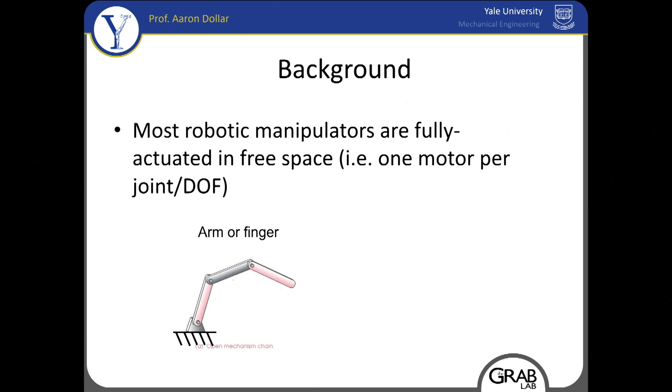If you think about most of our robotic systems, we put an actuator on every joint, and we can move them around in free space with no issue. If you imagine this three-link serial chain as a finger or an arm moving around, imagine there's a joint at all of the three links, no problem. The challenge really begins when you make contact, and the contact adds constraints. And I like this example because it should kind of hammer home a little bit the situation.

It's exaggerated to an extent, but when you make contact with that fingertip, that contact is going to impart some kinds of constraints to the system.

It won't be a complete joint like that, but it might functionally be a complete joint. The real issue here is that in free space, that 3-link manipulator has 3 degrees of freedom. But as soon as you make contact and establish that other joint or constraint, it goes to a 4-bar linkage, which has 1 degree of freedom.

So all of a sudden you had 3 actuators acting happily in free space, and now you have 3 actuators trying to control a 1 degree of freedom kinematic system. You're inherently over-constrained, redundant. It's a challenge, especially because most of our actuators, to be practical, have to be highly geared, and that makes them mostly position sources, which are especially sensitive to this kind of over-constraint.

So what can you do about it? Well, there's a lot of challenges I mentioned. Impedance and torque control is really the typical way you'd want to deal with this. It requires some way to sense forces or torques, and then deal with it. There's all kinds of challenges dealing with backlash and other things as well. But it definitely helps.

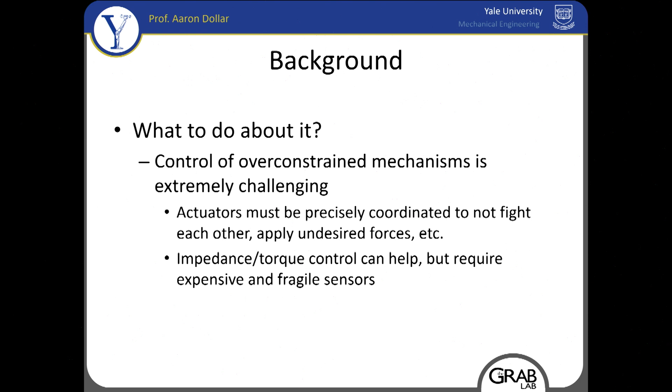In highly controlled environments, this is not as big of an issue, but in unstructured environments with a lot of uncertainty, it becomes especially challenging. There might be a solution to deal with this. There is a solution in that case, but you might not know what that solution is in order to make it actually work.

So essentially, where I come at this from is, instead of thinking about this in a control sense or other kind of sense, can you just deal with this from the bottom up, from a design approach? You probably know that compliance can help, and we already talked about how impedance control can help. It basically adds some springiness to the system, and that springiness allows some amount of passive reconfiguration.

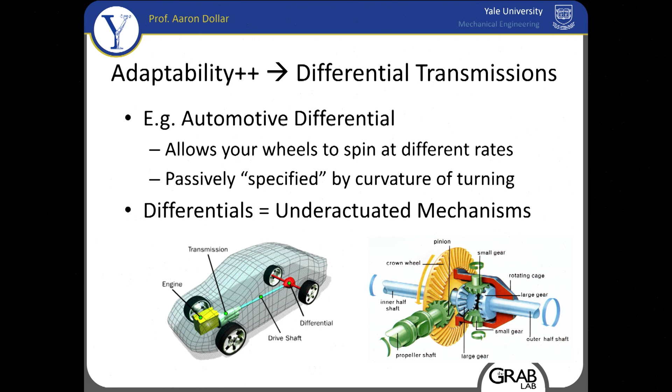So this is really a brilliant design. It's been the standard for 100 years now, essentially, in cars. And these differentials are what we call underactuated mechanisms. Underactuated comes from the sense that you have fewer actuators than degrees of freedom of the mechanism. The term underactuated is used in a lot of other senses as well, like in a control sense, but for us, we're talking about it from a mechanism standpoint, which you can think of as differentials.

Both compliance—mechanical compliance, which is springs—and differentials add degrees of freedom to the system to help deal with this overconstraint. So you're really not dealing with the overconstraint directly. You're basically adding more degrees of freedom so you're not overconstrained.

When you're talking about springiness, whether it's impedance control or mechanical springs, you have this constraint of F equals Kx, or however you want to think about it. That can be fine in certain situations, but in others it can be problematic. Either way, it's some kind of additional constraint. With differentials, they can essentially be completely unconstrained. There's friction in the mechanism, which adds some constraints, but you can get adaptability without that F equals Kx relationship, and also get a lot bigger ranges of motion.

Your car differential essentially has an infinite amount of range of motion that it can handle.

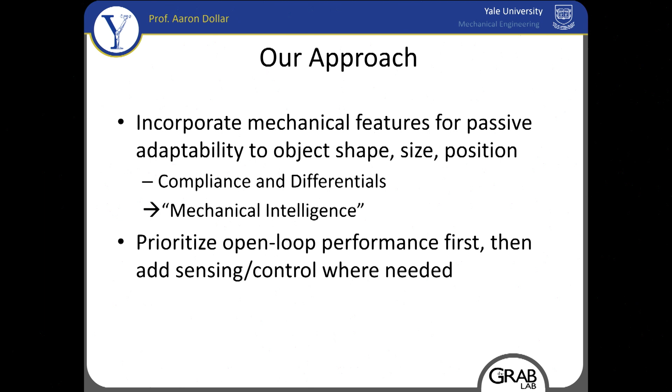So the approach I've been taking is to incorporate these kinds of mechanical features in order to deal with real-world contact issues that are highly problematic, especially in robot manipulation, and do it in a way that's purely passive. I started using the term mechanical intelligence—other people use similar terms now. Basically, this is trying to get computer scientists to appreciate the value of mechanical design, but it's basically just good mechanical design.

The idea is essentially to prioritize open loop performance first and incorporate some of these nifty mechanisms, and do it from a bottom up approach. Only really go to the point where you need additional sensing and control if it's absolutely necessary. We always need high level perception, but it's mechanism first, essentially.

One of the issues with underactuated mechanisms is, if you go back to that example of the finger moving in free space, to make it so it's not over-constrained at contact, you have to have it be under-constrained before contact. That's where the real challenge lies in designing these things—you can always add purely passive joints, but as soon as that constraint is removed, they're just going to flop over and not be able to support even their own weight. So you need to be able to apply torques to all of those degrees of freedom, and that's really where the challenge lies in actuating these things and coming up with mechanical solutions.

So you have to start off being under-constrained before contact, and we do use a lot of springs in order to have the robot keep its shape before contact. You try to keep them as soft as possible, but you have to deal with gravity and so forth. You basically want to loosely couple those degrees of freedom when you're moving in free space, so that when you do make contact, it's fully constrained.

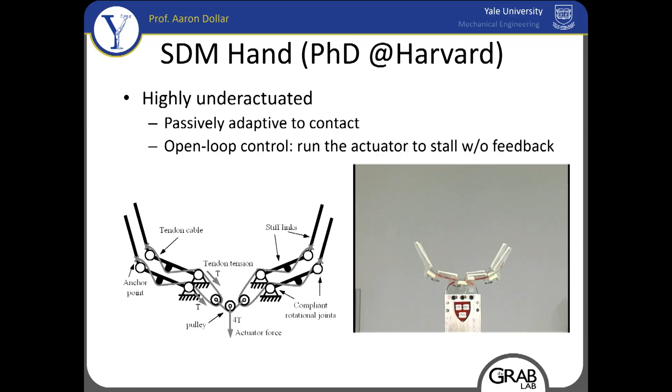Just to put this in a more concrete example, this is the hand that was the product of my PhD work. I did my PhD at Harvard with Rob Howe. Just to break it down, focus on one finger here for a second—there's a single tendon anchored on the distal link that runs over some pulleys to the base. Those pulleys are designed so that you apply torque to both joints of the finger, okay? And it moves freely over here, so this is sort of like a free spinning pulley.

And essentially when I pull this tendon, both joints move. There's some springs there that keep it in its default configuration. But I pull on this tendon and both move.

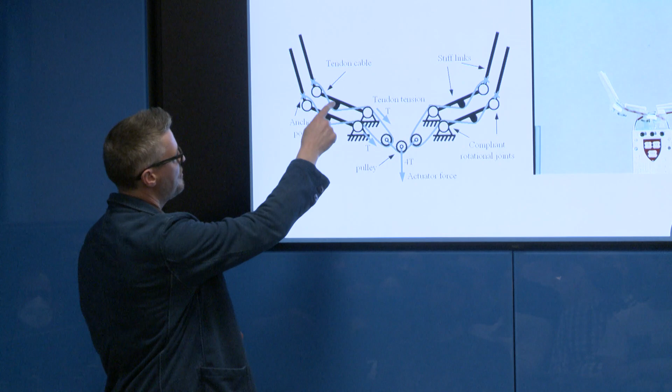Now, where this finger is underactuated is if I make contact on this proximal link, I can keep pulling that tendon, and this distal link is going to keep closing until it makes contact. So I can just blindly pull this tendon until it stops moving, and in an ideal world, which is what we try to design for, you're going to make contact on both links. Just pull it till it stops moving, and you make contact.

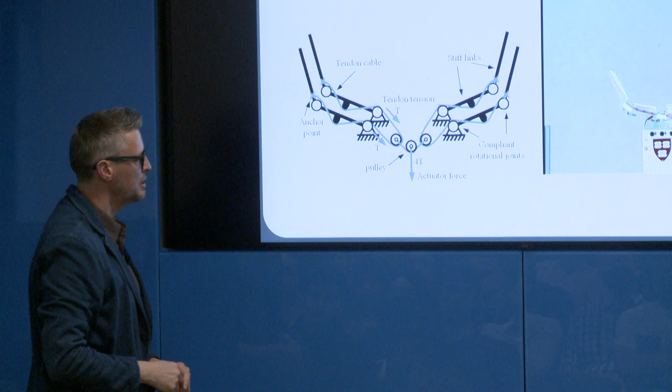Now, if you build up this pulley differential in this kind of stacked fashion, it allows all the fingers to kind of give or take tendon as needed, right? And you just take this single tendon at the base, and all 8 joints of this hand will continue to close until they make contact and are immobilized. So essentially, it's under constrained, and you just keep pulling this tendon until it becomes fully constrained, and that is when you have sort of a stable grasp.

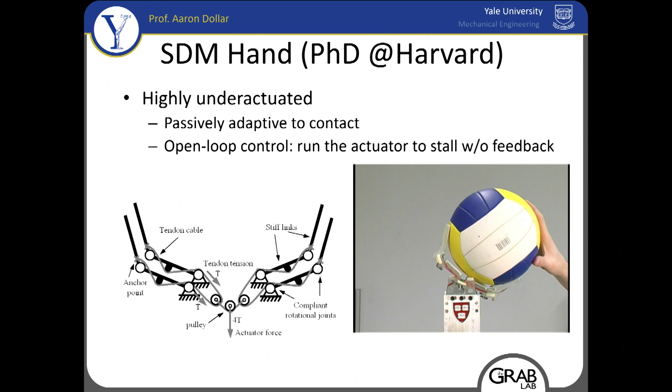So just to kind of show that here, this is all open loop. We're just running the single actuator to stall, and I'm just putting things in the hand, mostly just to show how it passively adapts to the different shapes of object, different positions of those objects, with the idea that we wanted to optimize not just the range of objects, but also the amount of uncertainty, right? So if you're offset from the center of the object and so forth, it still works.

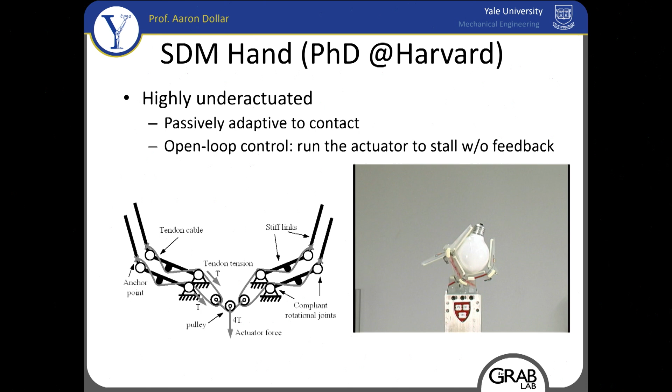Again, no sensing here whatsoever. We're just running that single actuator to stall. I spent a lot of time designing it, but it just sort of works passively because of this concept.

And then here's using it in a little bit more of an interesting setting. I'm teleoperating this. The robot there is set up in just the 3 degree of freedom configuration. So we just have essentially XYZ control of this, and I'm looking at it from the side, and I'm just hitting a button to close the hand whenever I want to.

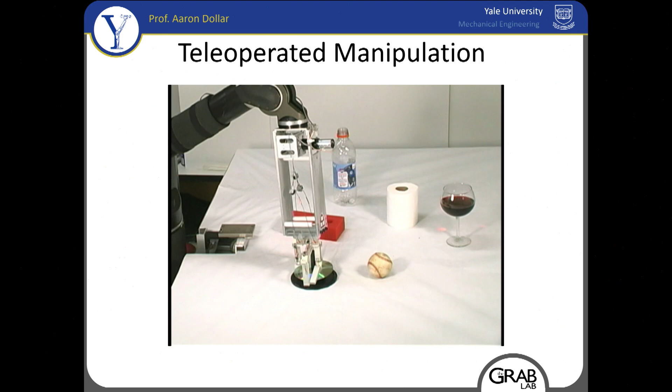You're seeing benefits not just of the under actuation, but also the mechanical compliance, which is off axis, right? I showed you that planar diagram in the last image. There's a lot of sort of softness off axis here as well, as you can see.

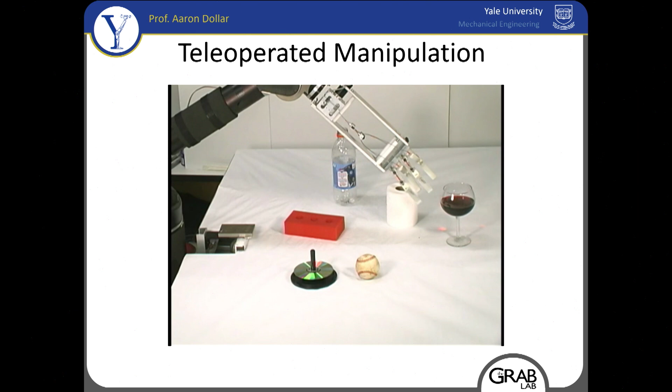So my typical joke here that I would tell, which maybe some of you have heard before, is I would do this activity and it worked great, very robust, reliable. There was a program manager coming through the lab, and my advisor said, 'Aaron, show him the demo, right?' And so, busy guy, I'm trying to do it fast and impress him and everything. And the first time I spilled the wine was in front of this guy, and we didn't get the funding, but. Anyways, it works really well.

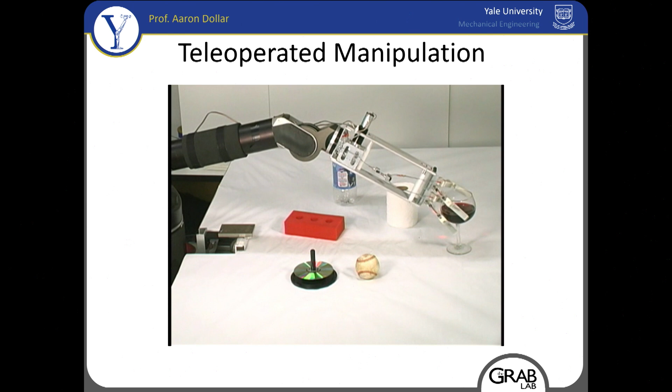You see that very natural, very compliant interaction. Certainly I'm benefiting from my own perception here, but if you really just focus in on the hand itself, right, it's all essentially open loop.

All right, so kind of just to summarize why it works, any of those contacts are going to add constraints. And in a typical robot system that is fully constrained to begin with, you're going to end up being highly over-constrained. And that's essentially because you're going from an open kinematic chain to a closed kinematic chain. And that's just physics. You can't get away from that. It's always going to be the case. And so any of your actuated degrees of freedom, especially because your actuators aren't ideal, they become redundant and you have to sort of precisely co-activate these things.

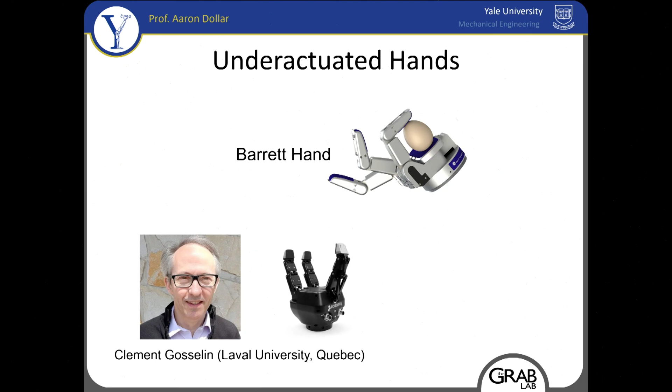Also, just to give credit where credit's due, if I can get back. So I kind of discovered this under actuation myself just by playing around with things, only to figure out that other smart people have figured this out too. The Barrett hand, which you could even buy when I did my PhD, has an under actuated mechanism in it. It's sort of a clutch type mechanism that decouples degrees of freedom from one another. And then Clement Gosselin at Laval University has really been doing amazing stuff in this area for quite a while. And he's often one step ahead of me. My nemesis now, he's great.

So this is actually work that Lyle Odhner did, who's here in the audience.

Just to show you how this can be applied to a bit more different types of situations. Here we designed the fingers and fingertips to be able to grasp small objects off the table. But you see there's lots of contact with the table here. Let me just replay these things.

So you're dealing with the constraint due to the contact with the table, as well as the constraints due to the contact with the key, and then also the closed loop constraints between the fingers once you make those kinds of contact. We're benefiting here from both the mechanical compliance, the springs in the joints, as well as the under-actuated closed loop chain.

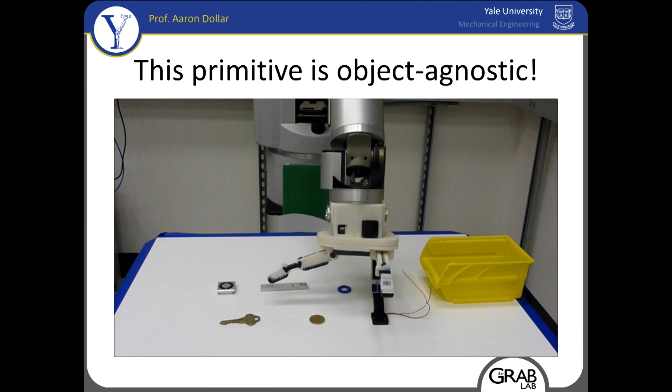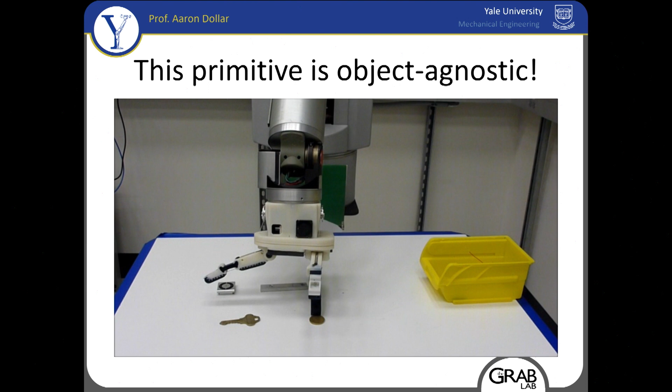Just to show you this, most robot videos you see the one good take, and you never know how many hundreds it took to get that one good take. So this is doing a whole bunch of these things one after another. All we're doing here is sensing the center of those objects and servoing the robot to that position, then doing an open loop, or feed forward, closing of those fingertips. You can see how robust it is.

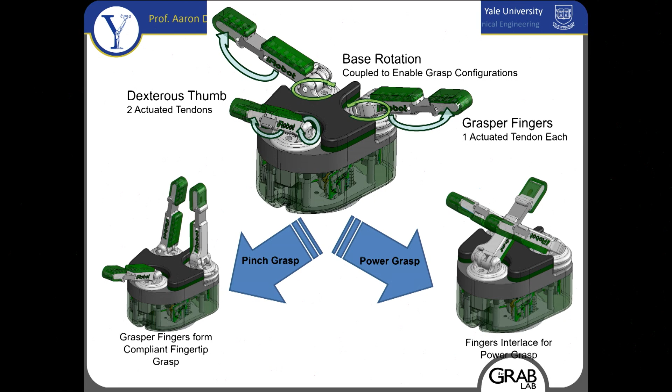This was the hand. It's three fingers, five actuators. We designed it so you could do both a pinch grasp for those small objects we looked at before, as well as a power grasp, like the first hand I showed you. And now we have a version of this available open source with four actuators that's otherwise similar, dubbed the Model O after Odhner, who named it after himself.

No, just kidding. But we had the original hand we called the Model T, and then we had to find other letters, so now we have a tradition of naming our hands usually after the person who made them.

So, all right, and they started a company. Lyle and two students from Harvard founded Right Hand Robotics, and they were selling the Reflex hand, as they called it for a while.

All right, so what I've shown you there is all grasping. Most of what I've been doing since then has been what you might consider dexterous manipulation, and maybe you'd also consider the pinching of small objects within-hand manipulation. But this is a much more difficult challenge.

But similar kinds of issues, right? You still have these closed-loop kinematic chains that you can't possibly get away from, so you have to design these systems to be highly under-actuated before grasp, before the object acquisition, in order to make it work properly.

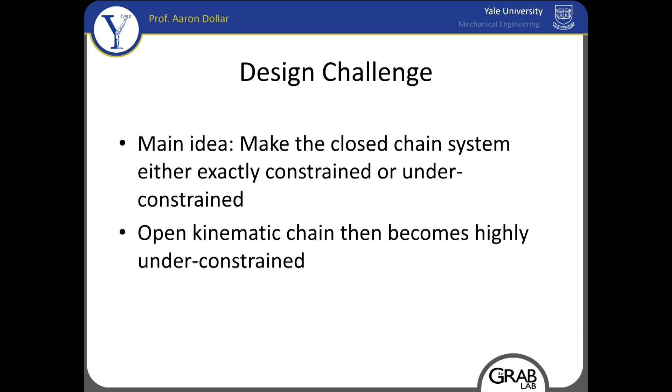At some point I realized there was a great analogy out there in terms of parallel mechanisms. If you think about grabbing an object with your fingertips, which is a lot of where your dexterity comes from, this is five parallel fingers or legs, however you want to think about it, all in contact with this object. People in the parallel mechanisms community have long wrestled with how to develop effective kinematic architectures that deal with having this highly parallel kinematic chain, without the actuators fighting each other.

And so essentially all practical parallel mechanisms out there are exactly constrained. What that means is, if you think about this Stewart platform - by the way, it's often used for flight simulators, with a cockpit and hydraulic actuators that move it around - it's 6 degrees of freedom.

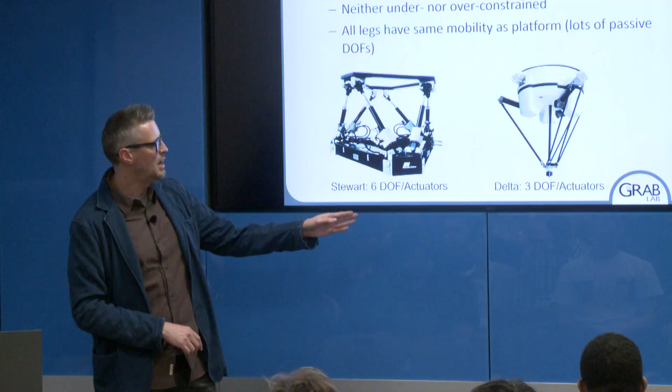Then there's the Delta platform, which you may have seen as a popular pick-and-place robot. It's got 3 actuators and moves in a strictly XYZ configuration. For all of these, the platform or output has exactly as many degrees of freedom as there are actuators. So for a 6 degree of freedom parallel platform, there are only 6 actuators, and any more would be redundant - they have to have some sort of orthogonality to them.

So what happens is, if you think about these connections, if this platform moves in 6 degrees of freedom, that means these legs also have to move in 6 degrees of freedom, right?

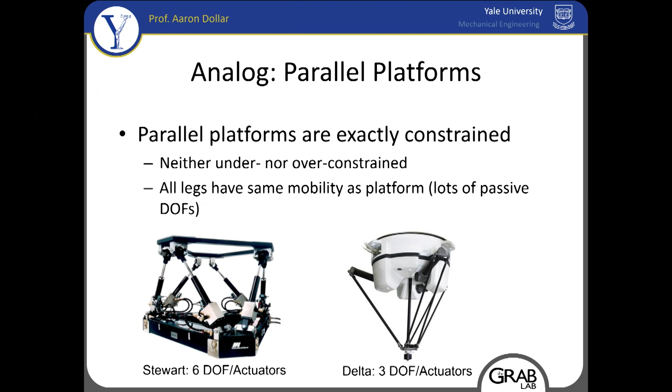Because they have to track it, each of these legs or arms, however you want to think about it, have to have 6 degrees of freedom. And if you need 6 total actuators, that means each on average needs 1 actuator and 5 passive degrees of freedom. So that's the case with these. There's usually a spherical joint on one end and a universal joint on the other, to add the other 5 degrees of freedom, because they all have to move with the platform. Same with the Delta platform.

So I started to hire some postdocs from the parallel mechanisms community to think about this, and we started doing a little bit of modeling and so forth to actually develop some hands from this. Sorry, I'm going to go quickly because that was written out versions of all the stuff I just said verbally.

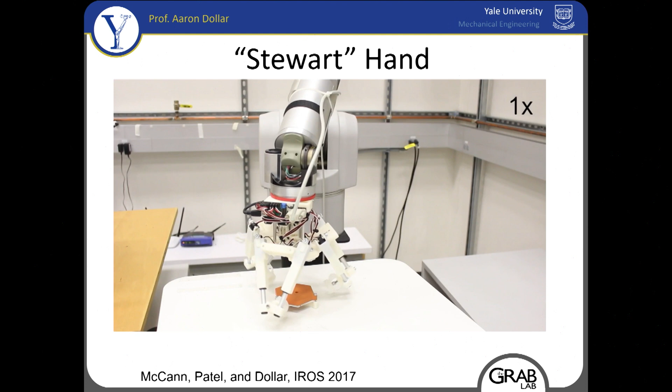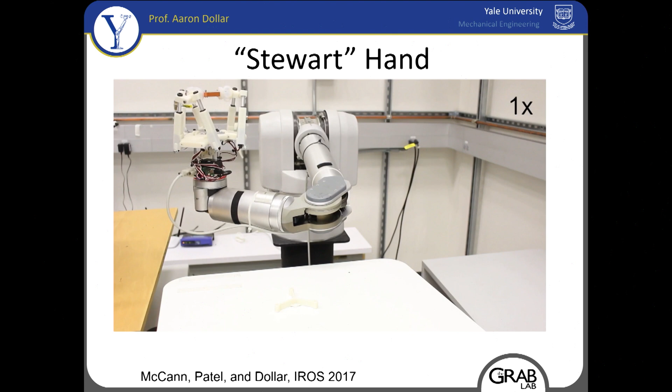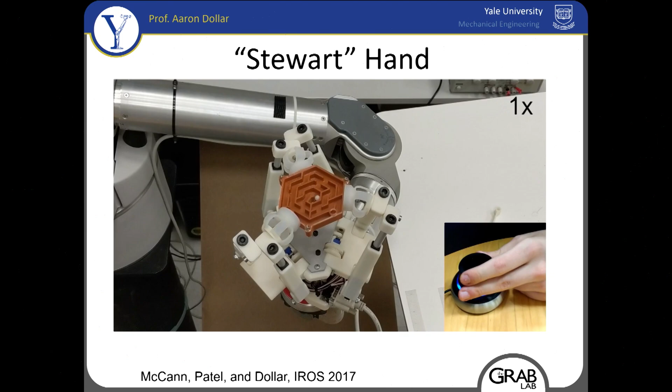This is what we call the Stewart hand. We essentially use the kinematics of the Stewart platform. It looks like 3 fingers here, but we coupled 2 of these actuators each to have sort of 3 fingers. We basically built a highly dexterous 6-degree of freedom hand that is exactly constrained—well, not exactly, there is one additional actuator that opens and closes the fingers, but after contact is made, that actuator is sort of out of the loop. So we can grasp objects and manipulate them in 6 degrees of freedom. It's teleoperated here, but you can see the dexterity, and we have similar ranges of motion as the Stewart platform, so it's a pretty effective mechanism.

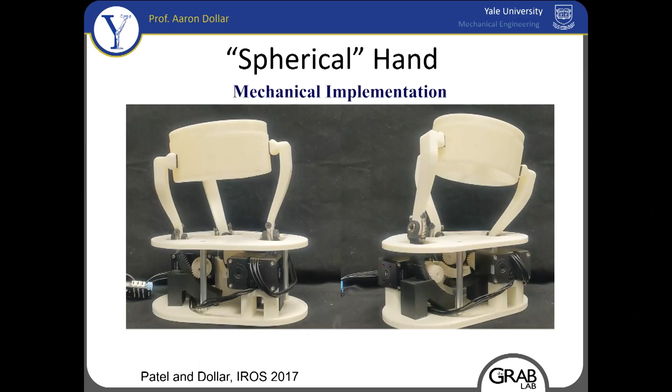Another cool design—we actually have a new version that's even better. This hand we call a spherical hand because there are 3 axes that all intersect the same point in space, making it a purely rotational mechanism. That point is fixed essentially, so it doesn't matter what you're grasping or where the object is contacted with respect to the hand—you're always rotating the object about that known fixed point in space.

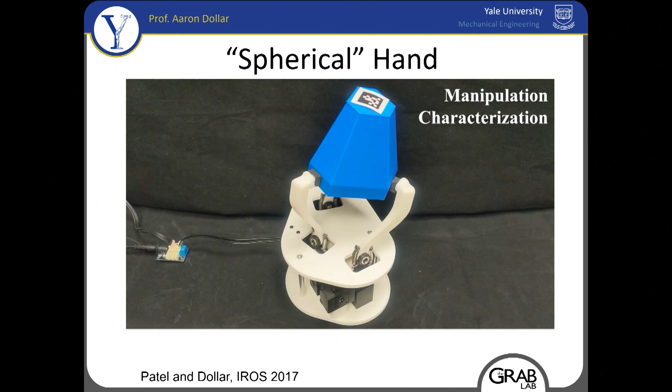At first we thought of this as just an interesting rotational mechanism, but now we think of it almost like a proxy or alternative configuration to a wrist, because that's essentially what your wrist does. Wrists are really hard kinematically, so the idea of unifying a hand and wrist together in a single mechanism is promising. This video uses the old configuration, which doesn't have nearly as much range of motion as the new one we're about to publish soon.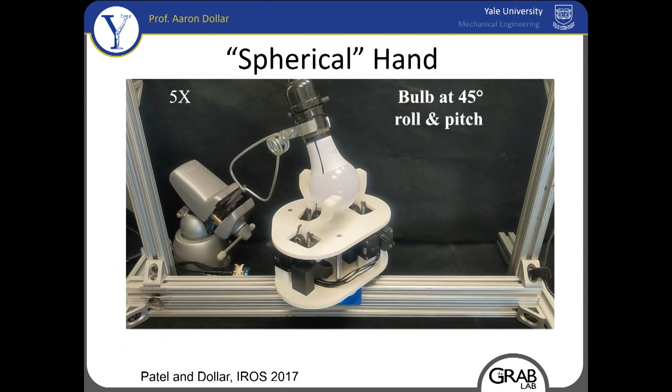This might be slightly out of order, but I started thinking about another way of viewing these constraints and the whole problem in general. From a control standpoint, you have all these axes—a hyperspace of control variables available to you. If you command your robot to do something, in these highly actuated situations you're going to have a single point in space that's a valid solution. With uncertainty in the system, you might think this point over here is the target you're reaching for when it's actually in the middle. This shows the difference with a traditional, fully actuated, rigid approach—you're always going to be off, and it's always going to break basically.

If you add passive springs or impedance control, you might dilate the volume you can be in and still have a successful solution to some amount. So as long as you're in that volume, if your uncertainty is limited, you still might be okay. Essentially, underactuated hardware allows a much bigger range of successful configurations, where as long as you're inside that volume, it's not going to break—it'll keep hold of the object and so forth. That's good not just for maximizing the allowable uncertainty you can handle, but it also enables a few other things I'll show in a minute.

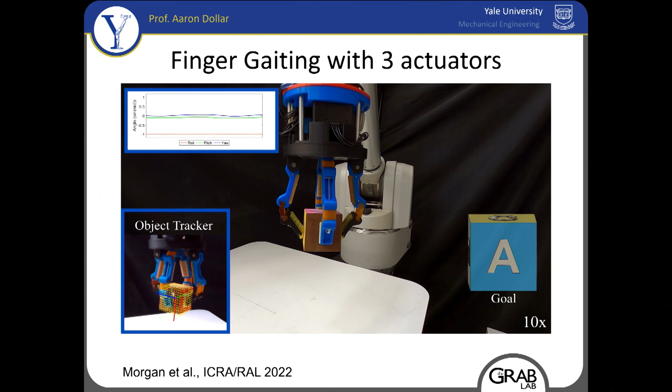This is called the Model Q, I think—we didn't have a Q in the lab. That was Ray Ma. This hand is specifically designed to do finger gaiting. There's a pair of fingers, two pairs of fingers, that can all grasp and hold the object. One of the pairs of fingers has a rotational axis on it as well, so we'll be able to grasp the object, then spin it to regrasp and orient it in a few different ways.

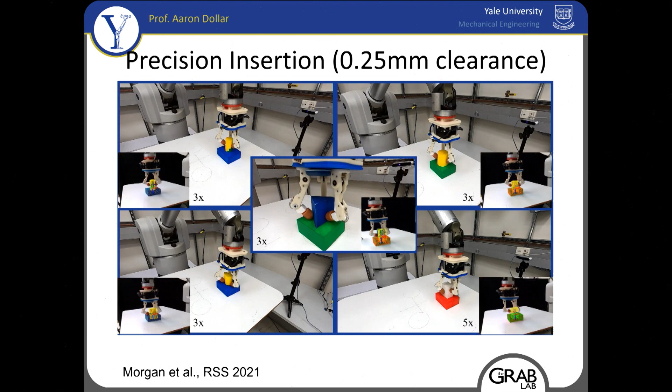This is another thing we can do to leverage the passive adaptability. This is very tight tolerance insertion—a quarter of a millimeter clearance between the objects and the pegs in the holes. We're leveraging the mechanical compliance and passive adaptability of the hand to do that.

That was sped up only slightly, Daniel, 3x. But we all have places to be, so, you know.

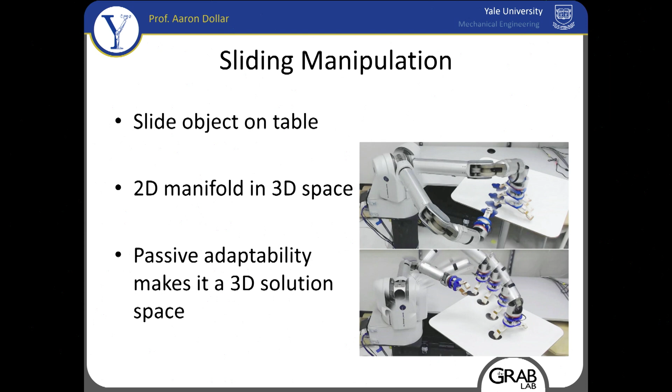When you're thinking about this from a planning standpoint, your searches can converge much faster because the space of potential successful solutions is much larger. We did a few things along those lines—sliding examples where you have the table constraint as a hard constraint on the motion, and trying to find a plan to move the object accurately in that plane of the table is very challenging, especially if you assume everything is rigid. We really leverage the passive adaptability here to make it a lot faster.

The other neat thing I'm even more excited about is that if you have this big volume of successful solutions, you can think of it as a safety region around where you're at. You can do all kinds of things knowing you aren't going to fall over and break, let's say. So you can do modeling and estimation online by doing exploratory actions in that space and watching what happens, or collecting data while you do it.

So where is that video? Did I delete that video? Oh no, I have a wonderful video here—it's just that I accidentally deleted it.

We had this great project called Self-ID, where we essentially would blindly manipulate the object. We'd give some actuation commands in random directions and perceive what happens. In this case we were using particle filters to come up with a controller, watching what happens due to blind manipulation and learning a controller online in a very effective way. That was a Science Robotics paper that came out a couple years ago.

If you're interested in our hardware—somebody asked last night, Ted actually asked, how do you make an impact when your work is on hardware design? Because you can write a paper and talk about it, but you can't just allow people to download code and run it. One option is starting a company and selling the hardware, but for research hardware there's not much of a market, so that's not a great solution.

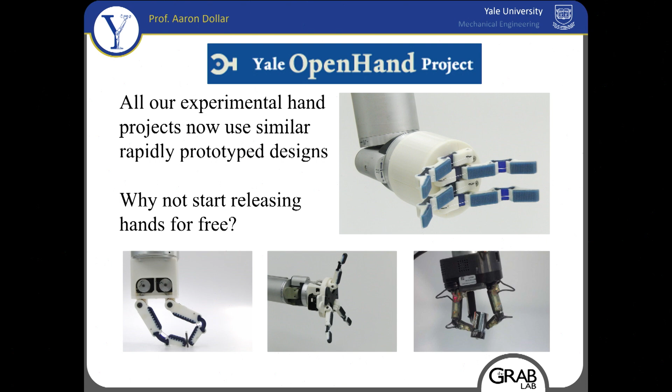So I started the Yale Open Hand project. There's something on the order of 8 to 10 different hand morphologies out there with modular fingers, and the CAD is out there so you can modify it as well, with really detailed instructions and videos on how to do the post-processing steps. We even do a lot of the soft materials through molding. At some point we're going to do a non-molding version - I don't think we ever actually got that out, but try it out. Pretty straightforward stuff, still we don't support these things so you have to figure it out yourself. But those use off-the-shelf Dynamixels and a bunch of other easy off-the-shelf components.

We also have a website that aggregates a lot of open hardware projects called Yale OpenRobotHardware.org. I don't even know how many projects are listed there, but there's a bunch.

Just a quick plug - my most recent PhD graduate did his PhD designing a prosthetic hand. He happened to graduate and work on a topic that was extremely timely, and got hired by Tesla to work on the Tesla bot... and this is not letting me forward.

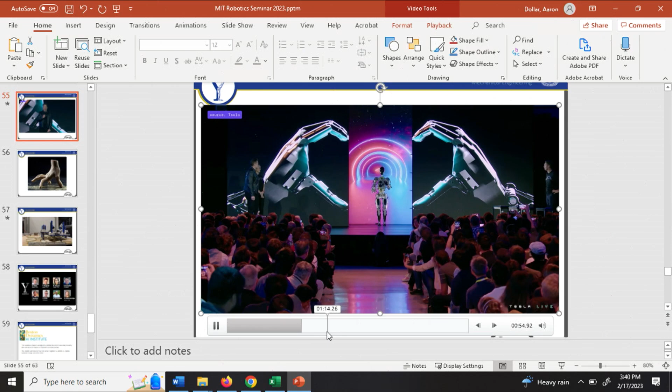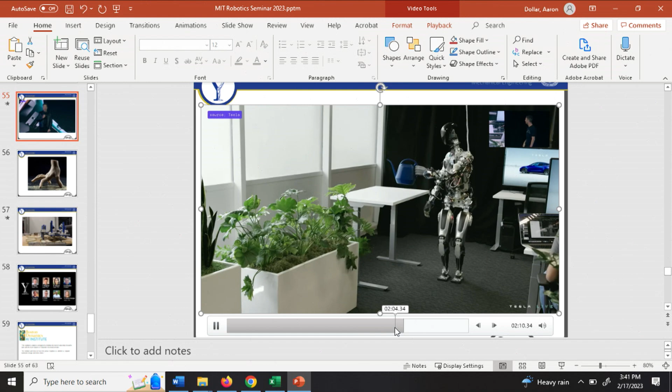So this is the Tesla bot, and those hands behind him are the hands that my student Mike ended up designing, and they're somewhere in here where it starts looking at the actual hands. Not incredibly impressive performance, but it was impressive that they did it so quickly - it was only like a year and a half or something.

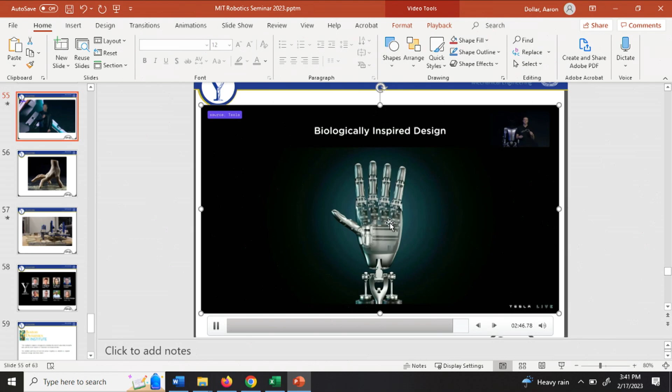So that's Mike there talking about his biologically inspired hand design. Anyways, I had no idea - I mean, I knew he got hired for Tesla. He was like one of the only people that worked on this, as far as I understand. It just was perfect timing where he had done a hand design and ported over a lot of what he did. These things right here were directly from his PhD work.

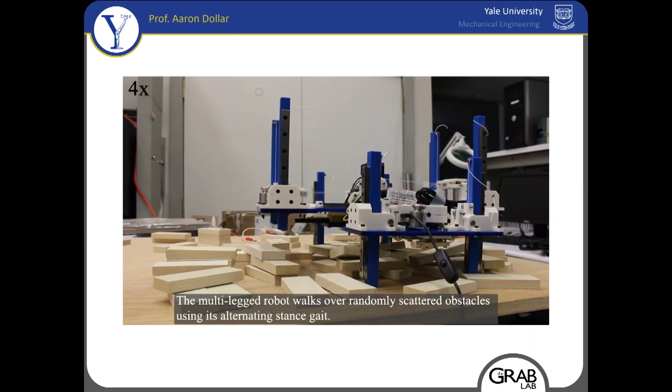We let the legs drop essentially and fall on the ground wherever the ground is - we don't know where it is. We're letting them drop and then essentially locking them, applying torque after they're immobilized by contact to support the weight of the robot. You can get a sense of how that works here - very rough terrain, very different heights. And again, it's feed forward. We're just running this thing through open loop commands, and it works rather well.

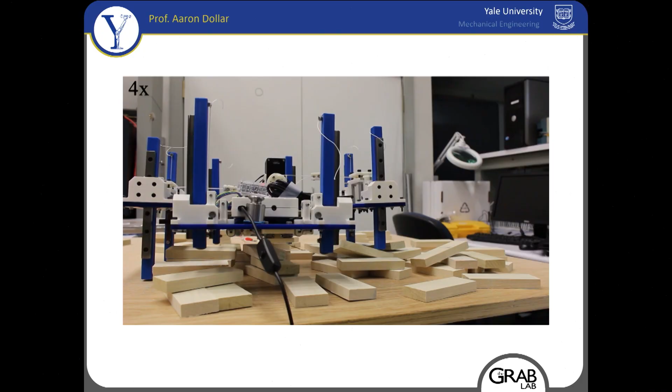All right, so we have a much bigger version of this now that works better, and is not 4x. All right, anyways - was it 4x the whole time? Did I lie? I didn't see it there.